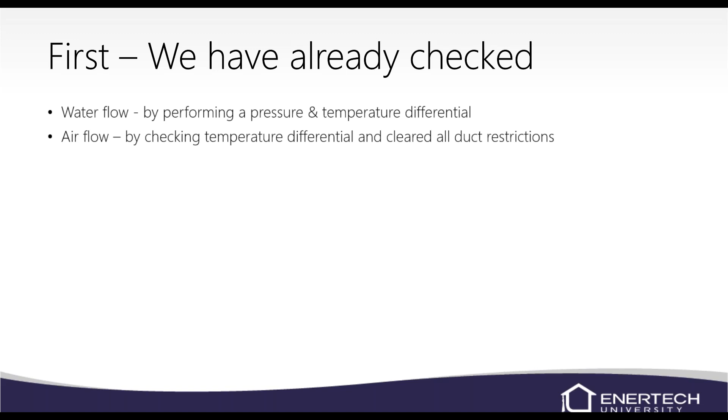We'll go ahead, and obviously we've already checked to make sure we have water flow by performing pressure and temperature differences, to make sure we've got water flow to the unit. Without water flow, we can't diagnose a TXV or a reversing valve. Airflow, if it's a packaged unit, you can usually hear the blower running, make sure your filter's clean, that kind of thing. On a water-to-water unit, make sure you have load water flow too. Make sure when we're installing water-to-water units that we always put pressure temperature ports on the source and on the load. It makes it a lot easier to diagnose when we have those in the system.

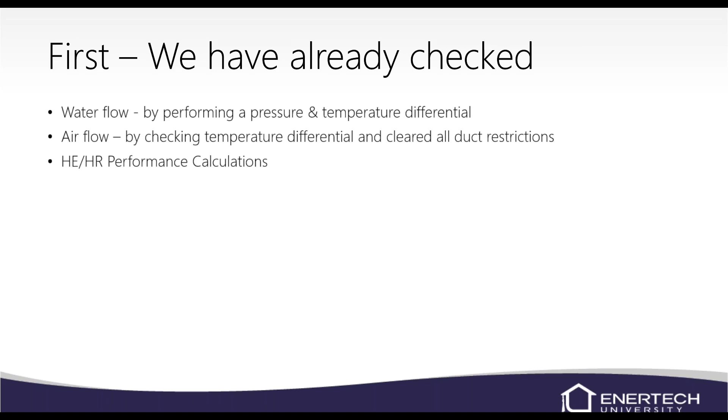We've already checked out the heat of extraction, heat of rejection, obviously it's not working out properly. And don't use your refrigerant gauges until you're sure it's a refrigerant issue. Again, water flow, airflow, and heat of extraction, heat of rejection will tell you if you've got an issue on the refrigerant side, the water side, or the air side. It's a sealed system, so we don't want to put our refrigerant gauges on there too much or start pulling refrigerant out every time we put them on there. Sooner or later, it'll get low on refrigerant.

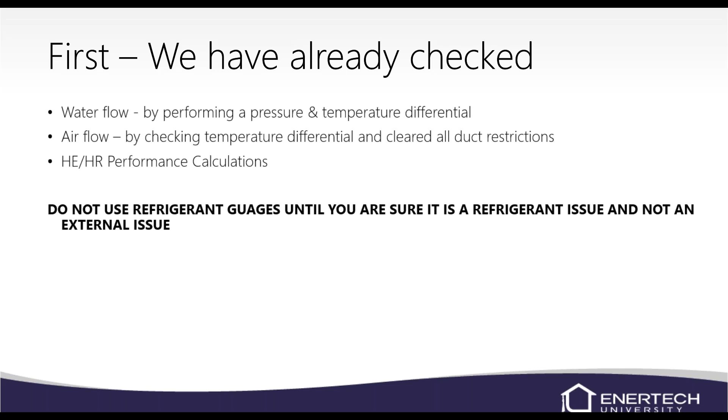So we're going to cover how a TXV works, the causes of a TXV failure, flooding symptoms and diagnosing, starving symptoms, hunting, and restricted.

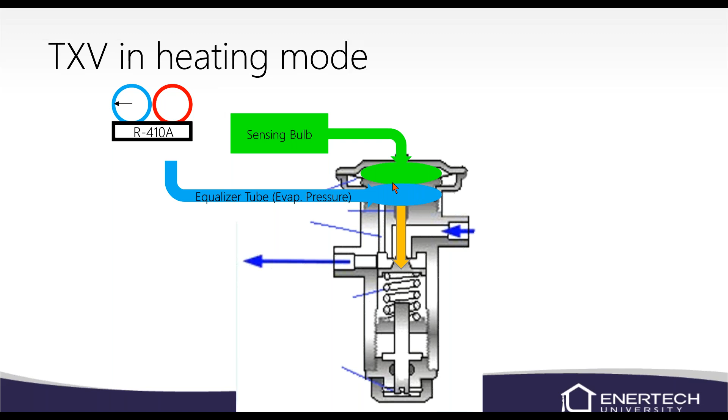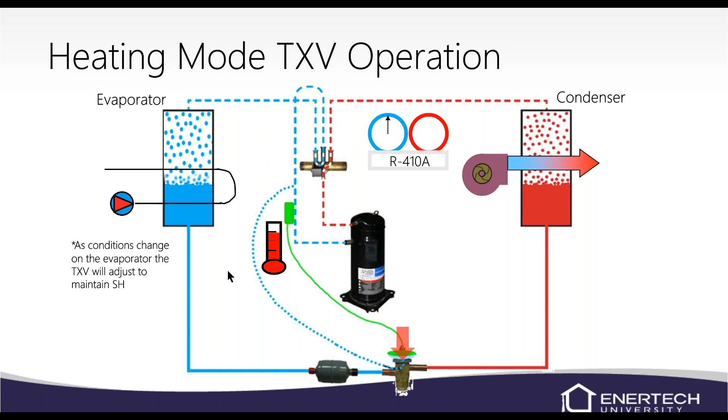So again, heating mode in operation. As conditions change on the evaporator, the TXV will adjust to try to maintain your superheat. An increase in suction line temperature increases the bulb pressure, thus opening the valve and allowing more refrigerant to flow. As the evaporator pressure increases, the temperature gets colder, and it will release some of that bulb pressure and close the valve off.

Obviously we have to have a higher accuracy refrigerant charge when we have a fixed orifice or cap tube system. So in a geothermal heat pump, we need to use an expansion valve because we need to adjust fairly quickly to conditions. The most visible indication of proper expansion valve action is suction pressure variation.

So if you take the bulb off the suction line and put it in your hand and warm it up, you should open up the valve more and allow more refrigerant to flow. So you'll see your suction pressures move by about 5 to 10 psi.

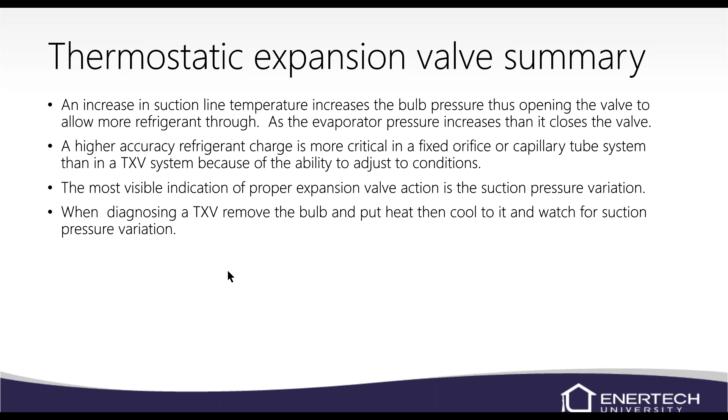Four causes of TXV failures. Flooding, so you're feeding too much refrigerant - it's stuck open, which is very rarely seen. We have starving, so it's not feeding enough - it's stuck closed. That's the most likely failure.

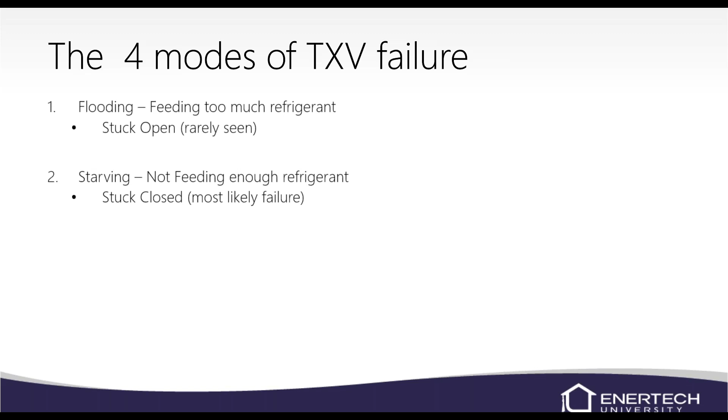A lot of times you'll go out there and it looks like the unit's pumping down, and that would be a stuck closed expansion valve. Hunting - you'll probably see that on your gauges, kind of bouncing around quite a bit. So it's feeding too much, then too little. The reaction is very quick.

It's not working in one mode or the other - more than likely the equalizer tube is plugged. Again, with a bulb loss of charge, we're normally going to send that valve all the way closed because that spring pressure is going to push up. So normally the equalizer tube is plugged up and that piston's not allowed to move up or down, so it's stuck somewhere in between.

Then we have a restricted TXV, so it's plugged up at the inlet. It could be stuck in any position, but again, it's normally going to stick closed.

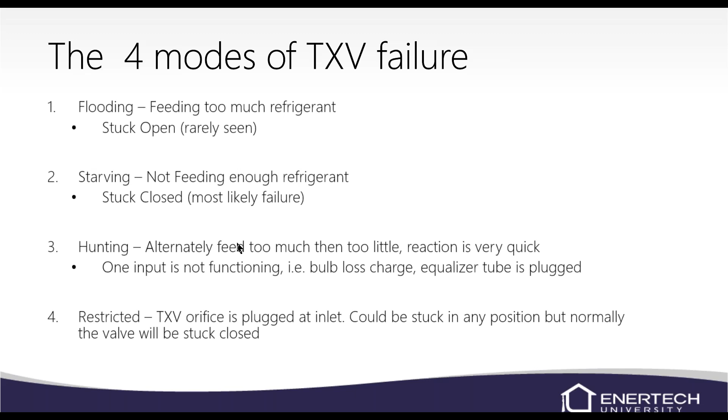This is a TXV that's stuck open. So you're going to have lower superheat and lower subcooling on that.

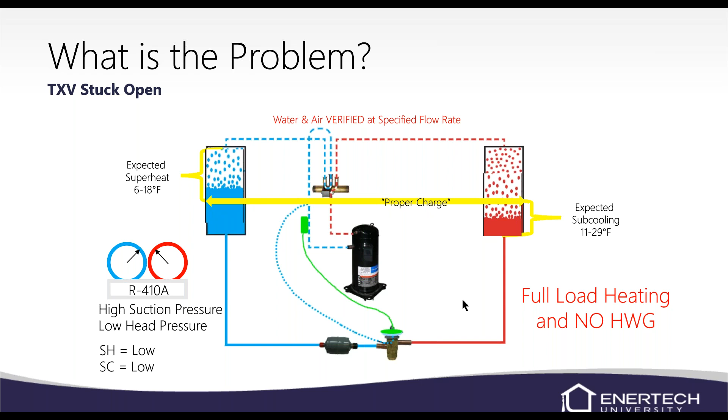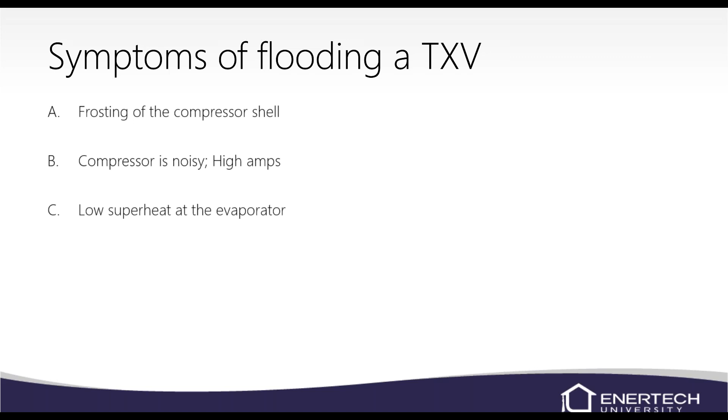Symptoms of flooding: you could have frosting on the compressor shell, the compressor is noisy, it's got high amp draws, it's running hot. You have low superheat and higher than normal suction pressures.

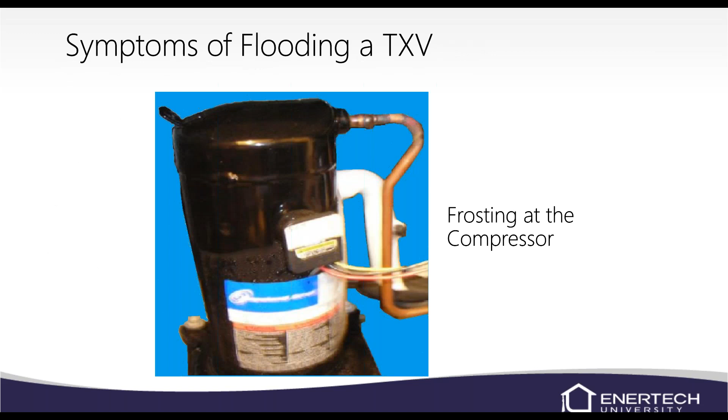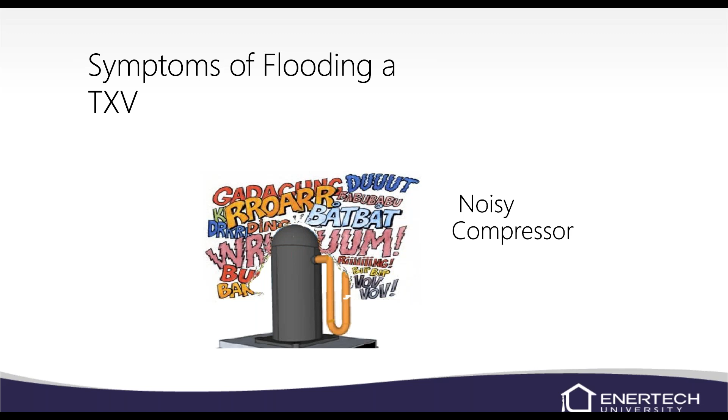There's some frosting on the compressor, usually on the lower half of it, and then maybe on the suction line as well. Noisy, might be rattling around, doesn't really like it. It may go into internal overload. It's really hard to say, but it will be noisy.

You can adjust some of our TXVs. I wouldn't necessarily recommend it, as they're set at the factory for your proper superheat. If you do have to change it or adjust it, remember how many turns you made so if you need to go back, you certainly can. You can count the number of rotations and go back to the original setting.

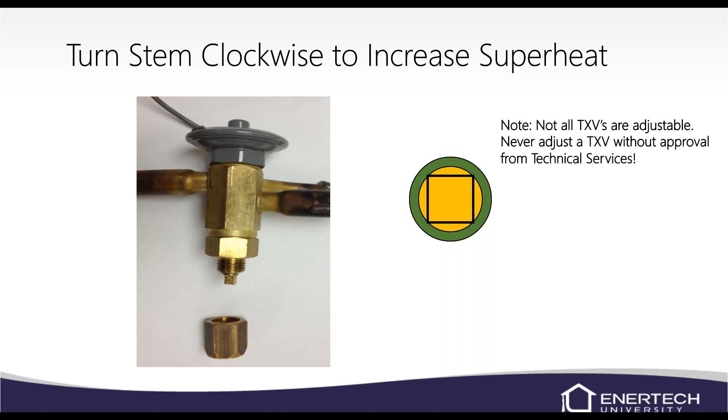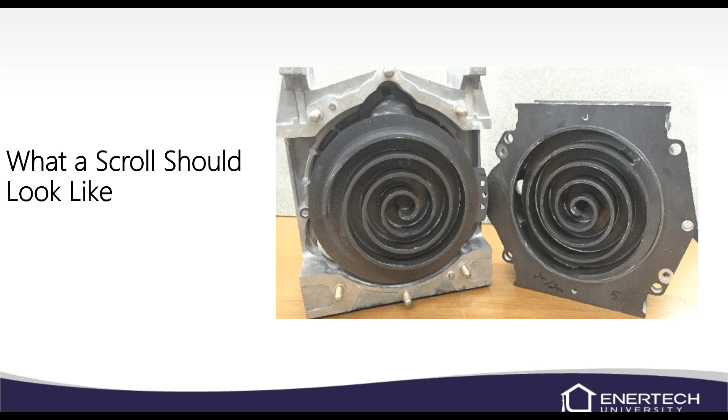This is what a scroll should look like - real smooth, vanes in there, no etching, no pitting, no scarring, anything like that.

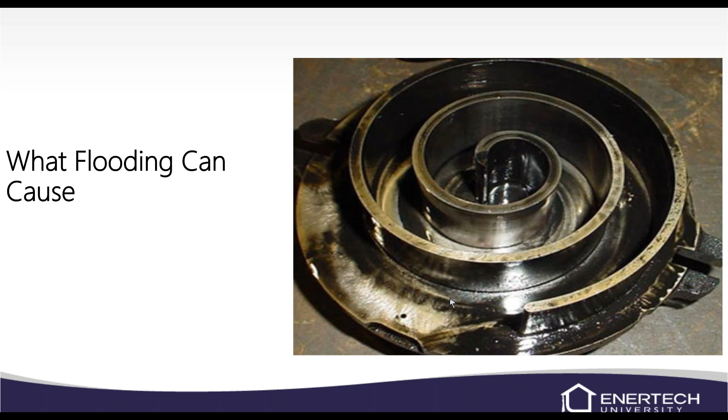Here's one that's flooded. You can see it's worn some of the paint off there on the inlets. It's kind of roughed up here, and you can see some pitting along the walls.

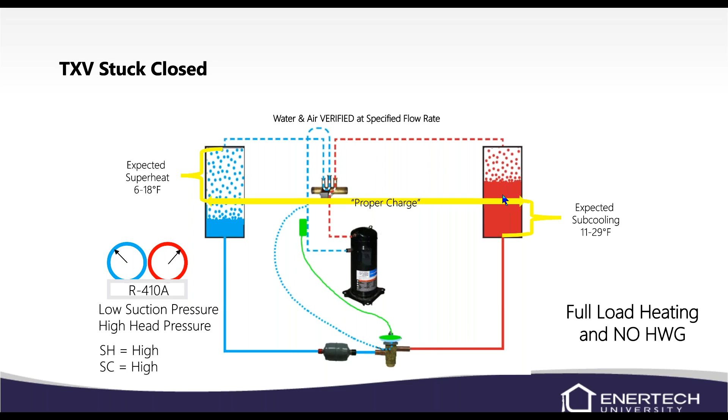Some causes of starving: you could have moisture or debris in the system. If you just made a repair, make sure you always change your filter dryer and that you're brazing with nitrogen, and never torch out a component. Always cut a component out of the system.

Have a restriction on the inlet, clogged strainer. Our TXVs no longer have strainers in them, so we shouldn't really have to worry about that too much. Be low on refrigerant. The pin is stuck in a closed position on the TXV, or the bulb has lost its charge.

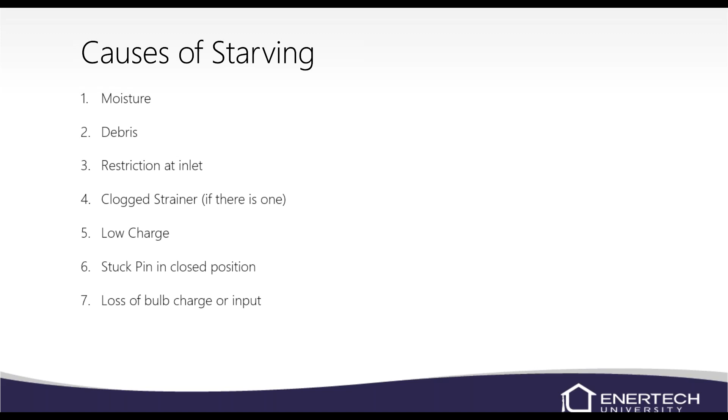If you have moisture or debris, it can actually kind of freeze up inside that TXV, and it won't allow it to open properly. So the fix on that is, again, always replace your biflow filter dryer when replacing components. Install a liquid line moisture indicator/sight glass, and that'll tell you if you're getting moisture in it after you've made your repairs.

And operate in reverse mode to purge some of the debris. Now it's just going to get stuck. It could get stuck somewhere else, but you can try to work it in the opposite direction, try to break it free, and maybe it'll get caught in the filter dryer.

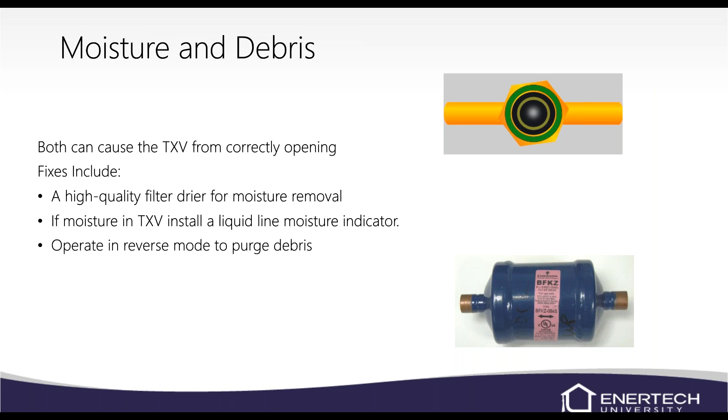So again, loss of bulb pressure. There's nothing to push down on that spring, so therefore that spring pushes up and closes the valve off.

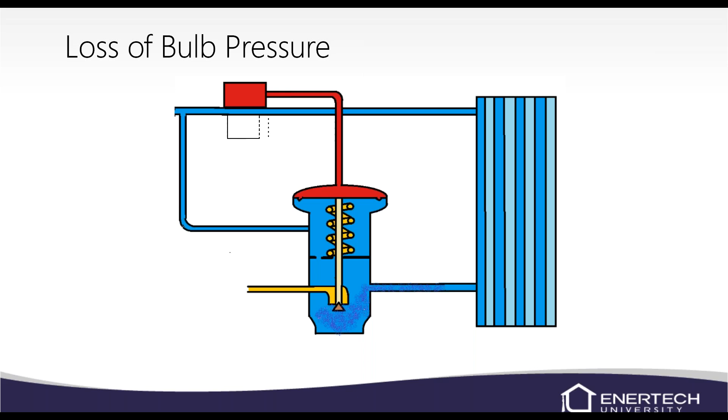We can change just the head and the sensing bulb on the valve. You can normally take that, you have to back up the body of the valve, and you can use a wrench and take off the head, and you can just replace the bulb head.

You can actually take, if you don't know if the bulb is good or not, take the head off the valve, there's a little disc underneath there, and if you tap on that and it's loose, that means the bulb has lost pressure. Normally the pressure will seat that disc, so you can't push it. So if it loses bulb pressure, then it's real loose. You can hear it clicking around in there, and then you know that the head is bad.

If you do replace a head under warranty, please let us know that you're just going to change the head. Just to be fair to everyone, it takes about 10 minutes to change the head on the valve, but it takes a couple hours to change the whole valve. So we pay different amounts on labor on that.

And so we would prefer that you be honest with us. We're honest with you guys. So we would prefer you be honest with us and just let us know that you're just going to change the head.

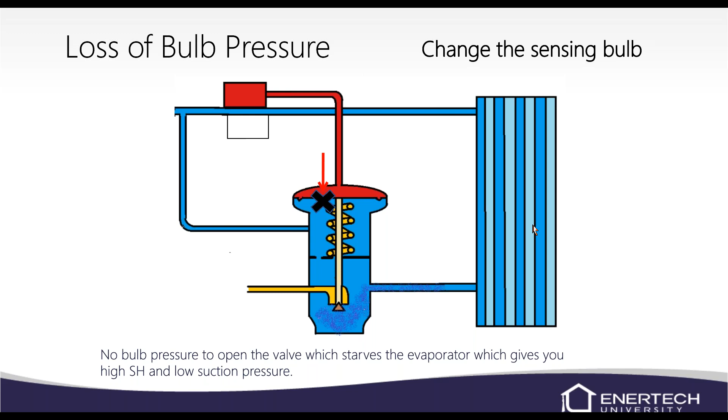Hunting symptoms could actually be caused by an oversized valve. So maybe you got the wrong expansion valve in the system, or maybe it's for a different refrigerant. Bulb location and contact with pipe, make sure it's insulated as well, so it's reading properly.

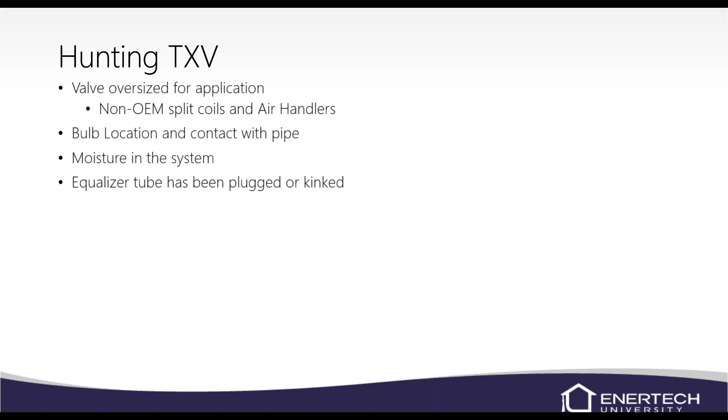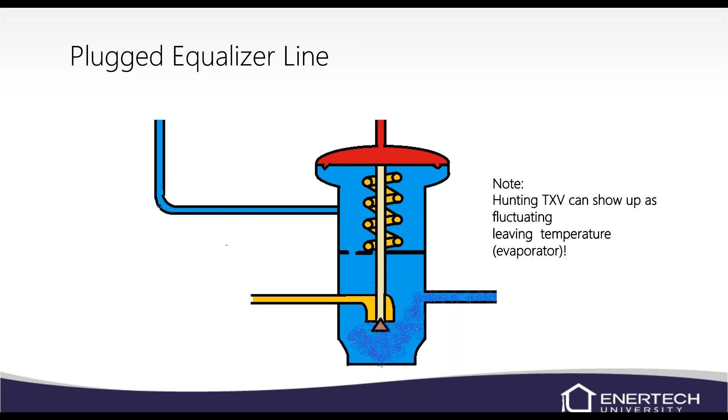There could be moisture in the system. Again, if you suspect that, there are ways to try to remedy that. Equalizer tube is plugged or kinked. You're normally going to see fluctuating suction temperatures, so it's going to be kind of bouncing around there, and that's a sign of hunting.

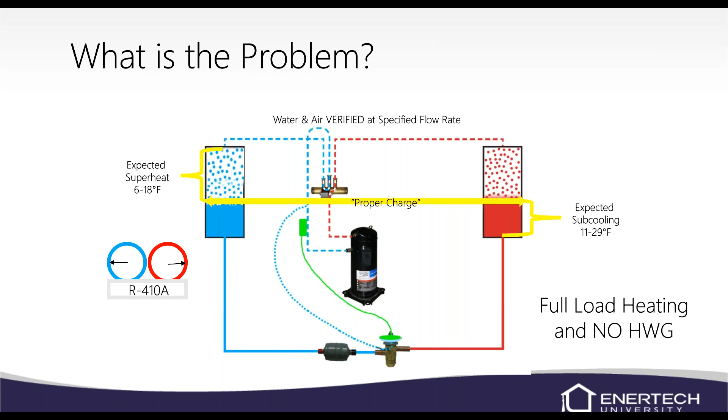Restricted - it depends where the valve is stuck at, but normally you're going to have high superheat and high subcooling. Basically, flash gas is created at the inlet of the TXV, so you can look for either frost or moisture on the liquid line at the TXV. It's basically flashing, and it causes a refrigeration effect right where it's flashing off.

If the refrigerant is normally warmed and such, it's a sure sign of a restriction if it's colder or there's moisture on that line. I don't see the expansion valves frosting a whole lot, but occasionally we will.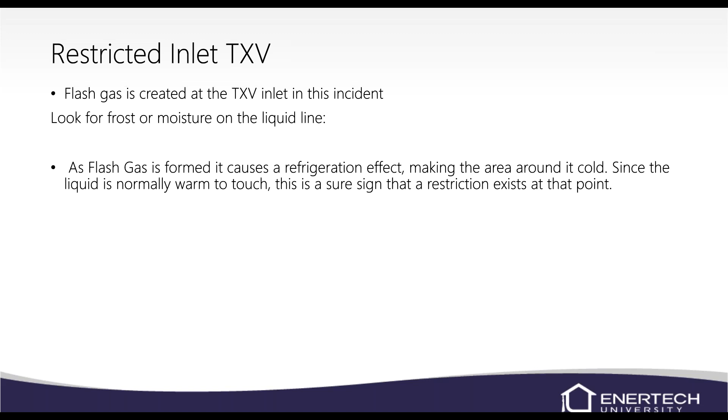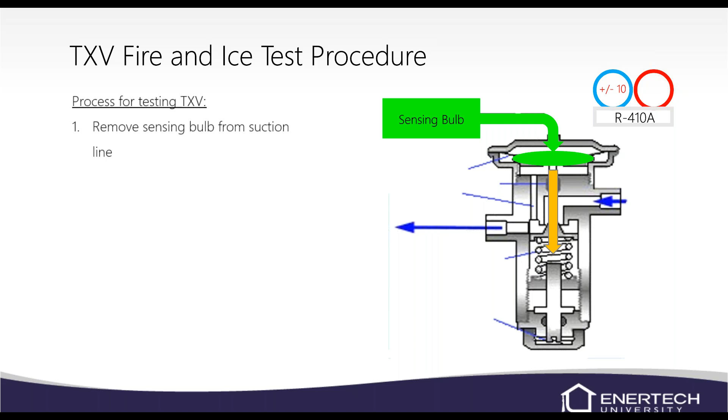Fire and ice test procedure for testing an expansion valve. Run the unit, I don't care if you're running it heating or cooling. We're going to remove the sensing bulb from the suction line. Have to remove the insulation and loosen up those copper straps. Pull that off and put it in your hand and warm it up and watch your refrigerant, your suction pressure.

If you don't have any change on your suction pressure, the TXV is not responding and it will need to be replaced. Again, check the bulb first, or check the head of the expansion valve and see if the bulb has lost its pressure.

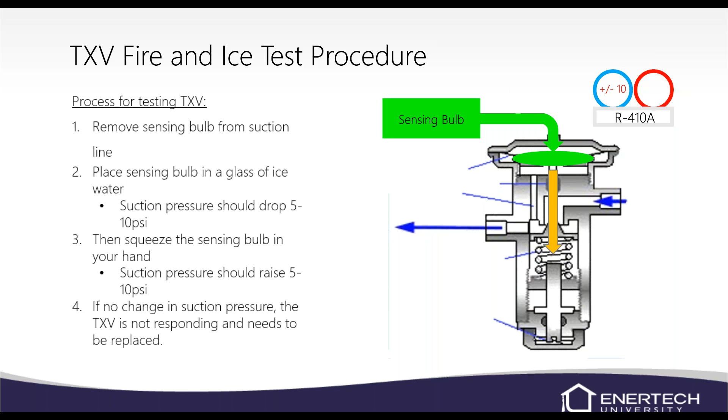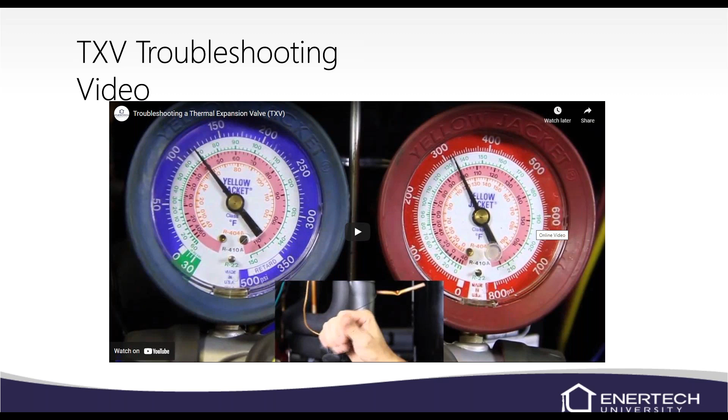We do have a TXV troubleshooting video on YouTube as well. You can see that's actually my hand there holding a bulb, warming it up, and looking at our suction pressure, which is on the left side there. We do have it on YouTube as well.

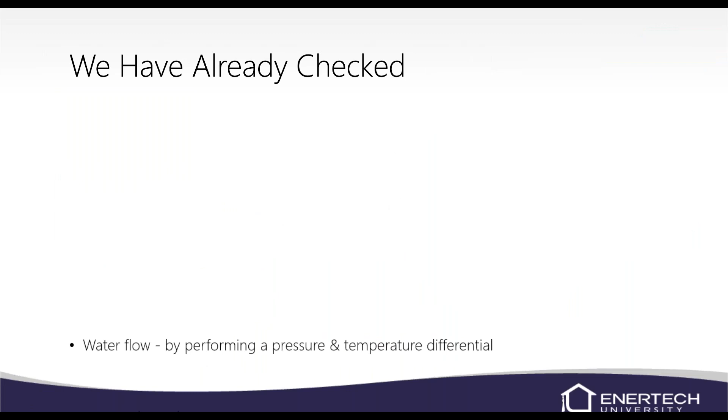Reversing valve. So you've already checked, again, water flow, airflow, and your heat extraction, heat rejection.

We all probably know what a reversing valve does. It switches it from heating to cooling mode. We power our valve, so when it's powered, the unit is in cooling mode. If the valve gets powered but doesn't shift, we're going to be stuck in heating mode.

So our discharge in heating mode goes through the air coil, back through expansion valve, through the coax, through the suction line on the back from the coax to the suction line on the compressor. In cooling mode, we're discharging to the coax, and then we're going through the coax, through our expansion valve, through the air coil, and back on our suction.

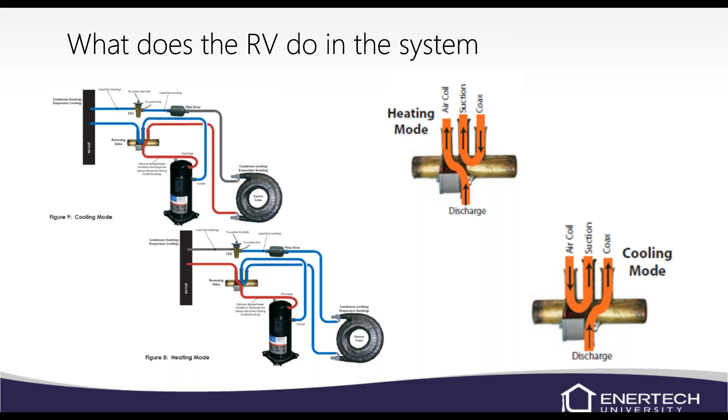It does have a three-way pilot valve on the top of the body of the valve, and that's what actually gets energized, and then it allows discharge pressure to bleed or be pushed on one end of the bell of the slide on the reversing valve, and then the discharge pressure actually pushes the valve over.

The temperature of each line is the way to tell if any refrigerant is bleeding by. So, in this example, our suction and our loop field coil should be the same temperature, and then the discharge in the tube on the left should be the same temperature. If you get about 4 or 5 degree temperature difference in between these, then we know we're probably bleeding through. So these are your pilot tubes.

If you ever really closely looked at a valve, you'll see some really small tubes on the ends and then one on the discharge line. Basically, it bleeds out of the discharge, comes into the solenoid.

Depending on where this black slide is, if it's over to the left here, like in this diagram, it's going to push over on this side. Because this pressure here is your discharge pressure, and this pressure here is your suction pressure. So we got more pressure on the left than we do on the right, so it's going to slide that valve over to the right.

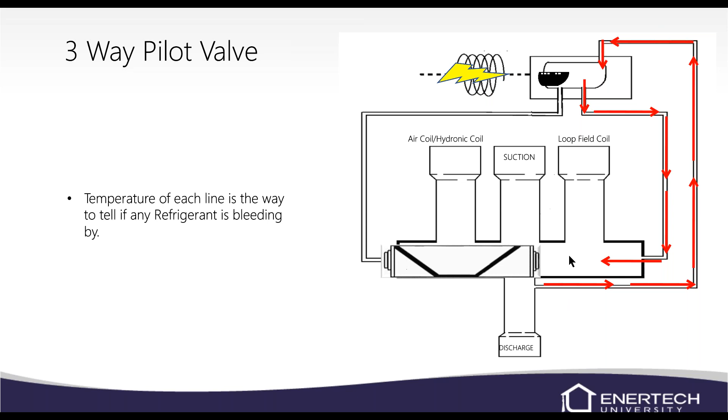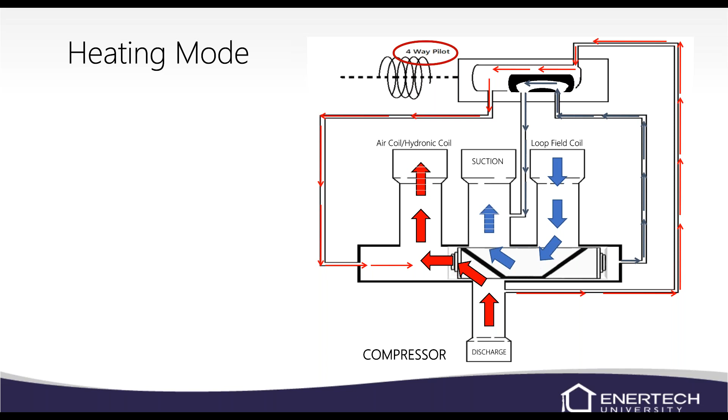The reversing valve won't shift because your pressures won't change. In heating mode, again, the valve is not energized, so that's going to be the path of the refrigerant. In cooling mode, now it's energized, slides over, bleeds off that higher pressure on the discharge. Now your discharge is coming through on the right side, and it's going to slide that valve over.

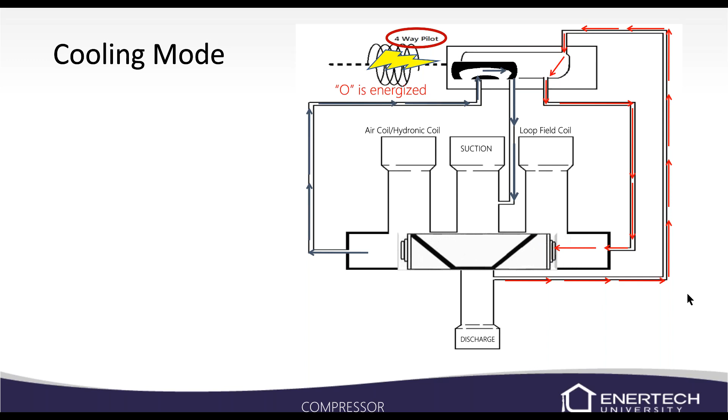Failed solenoid coil. If you have an O call, which is for the reversing valve, or our cooling call, if it doesn't respond, it will fail safe to heating mode.

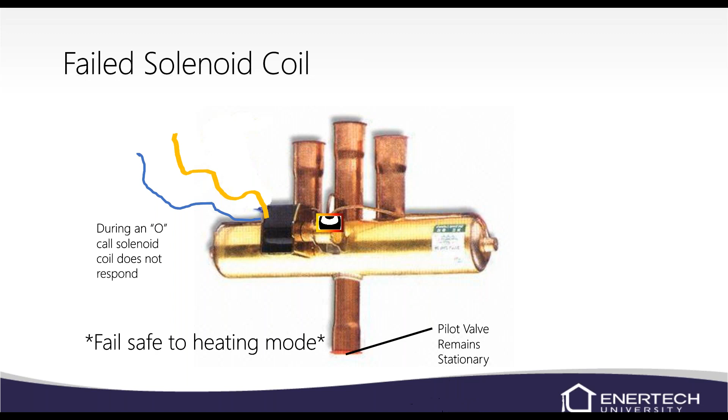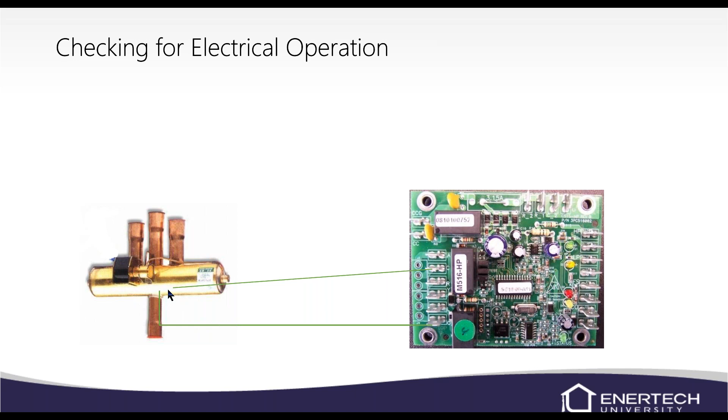Obviously, check the electrical operation, go to the lockout board and check between common and O, and make sure you have 24 volts going to the valve itself. You can also ohm out the coil on the valve. If it says OL, then it's open and it'll need to be replaced.

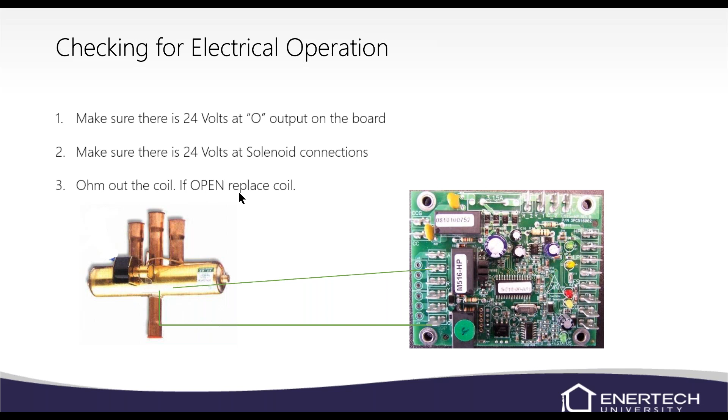Refrigerant leaks. Normally, if we see refrigerant leaks, we see them more on a water-to-water unit. A lot of times it's because they're running the unit too hard, with too high an aquastat temperature, and it starts to rattle the unit with a real fine harmonic vibration. These little pilot tubes will leak, break, or snap off. It's kind of hard to see, and it won't really leak a whole lot of refrigerant at one time. It really depends on what mode it's in as to what type of refrigerant it's going to leak.

So check those. I have seen on these ends, those are pressed in and then soldered shut. I have seen these little end bells leak as well. The body of the valve, I doubt that it's going to leak, but where these pipes come in, they could leak there, the end bells, or the pilot tubes.

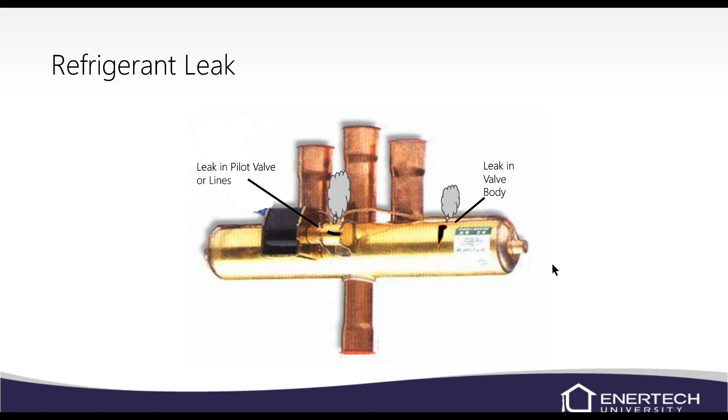If it's sticking while heating or cooling, that could be caused by debris. If you have an acid burnout on a compressor, when you file the warranty on that, you can most certainly ask for a reversing valve. If you think there's going to be a lot of debris in there that could get stuck in that reversing valve, I don't have a problem with it. I'd rather have you change the reversing valve when you change the compressor than install the compressor, run the unit, and realize that you're going to have to change the reversing valve. Now you've just doubled your work.

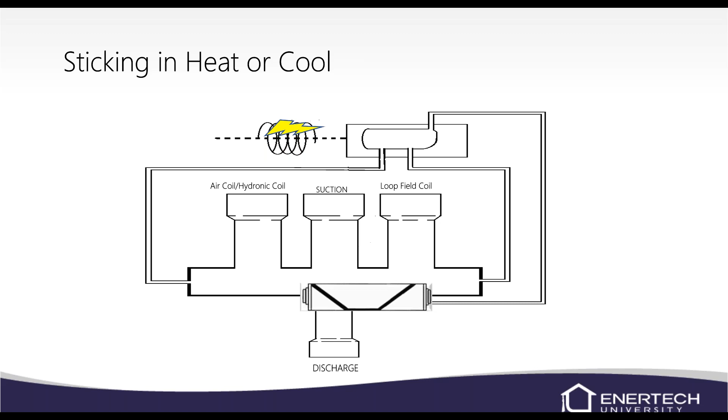Now, if you have to change the reversing valve, it's going to add 4 more braze connections and about half an hour of time. So it's not as big of a deal. It's a lot cheaper on everybody there.

If the valve sticks in mid position, usually the refrigerant pressures will not be equal, but they're going to be close. When they're equalized, that's usually the compressor not pumping. When you're bleeding through, unless you're bleeding 50-50 on all 4 lines, you're not going to get equalized pressure. Normally it's going to be maybe 150, 175, 130, 175. They're going to look weird to you, and you'll have low discharge pressure and a little bit higher suction pressure.

Again, that could be caused by debris. Maybe the valve's got a defect in it, a big dent or something, I don't know why. But again, they're a little bit off, not quite equal, but look somewhat similar, and you've probably got a problem with your valve.

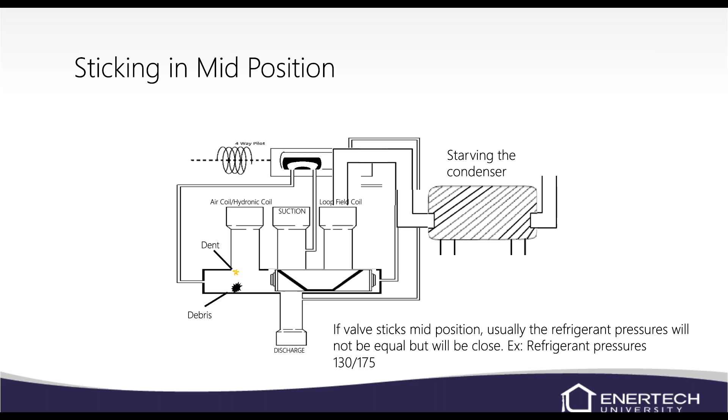This would be sticking in mid position. When it's sticking mid position, it could sound like a scroll compressor running in the wrong direction, and the unit may go out on internal overload. You will be starving the condenser.

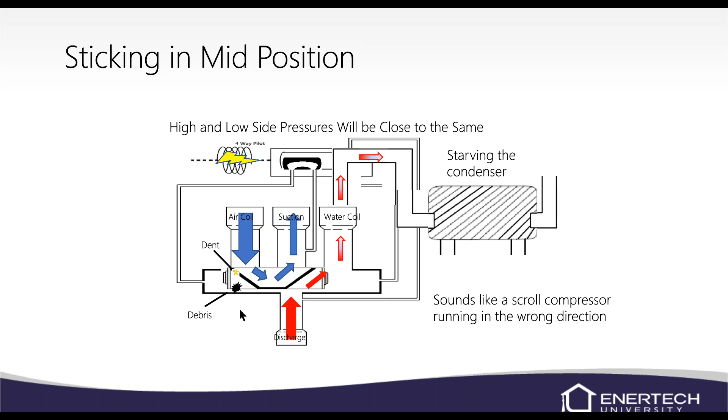You can get these little earth magnets from Michael's or Hobby Lobby or something like that, little bitty round magnets. You can put those on the valve body, and they won't stick to the valve body, but they'll stick to the slide that's underneath that valve body. The valve body's brass, so it's not magnetized. So you can put the little magnets on the ends of that slide internally. This is metal here, this is metal here, so those earth magnets will sense that. You can put 2 earth magnets on it, power that valve up, and see if it slides, and kind of watch those magnets to see what kind of travel they have.

The inside seals leaking, again, that's going to be bleeding through. Then measure your temperatures. Obviously, your suction and your water coil in this picture should be the same temperature, plus or minus about 3 degrees. And your discharge and your air coil should be about 3 degrees, no more than 3 degrees difference as well.

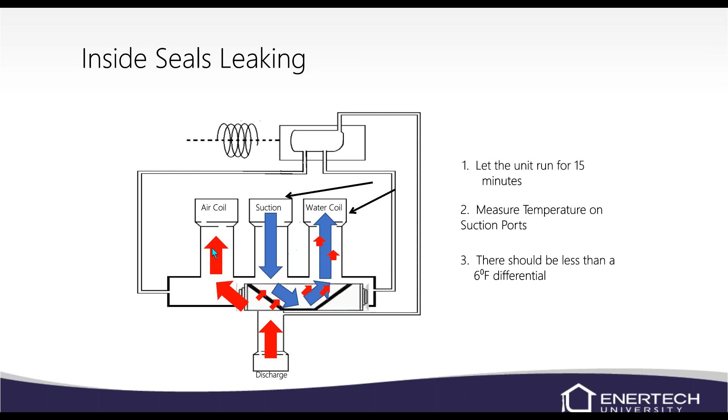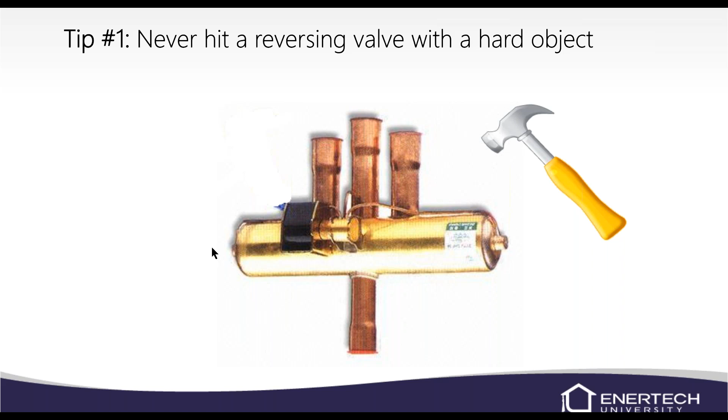You can tap it, or if it won't shift, you can try to tap it. I wouldn't hit it real hard because you can dent the body of the valve, but at the same time, the valve's not working anyway, so what's it matter? You can try to tap it and see if it'll work and get it to slide. If it does, more than likely it's going to get stuck again, so just replace the valve.

If you're in a pinch, sometimes you can get a great big magnet and put it on there and energize the valve, and when you energize it, slide that valve over by hand, and it may slide over. It'll have to be a pretty big magnet, though. Never cut copper pipe with a hacksaw of any sort. I always use tubing cutters. We lose a lot of copper shavings in the pipe when we cut it with a hacksaw.

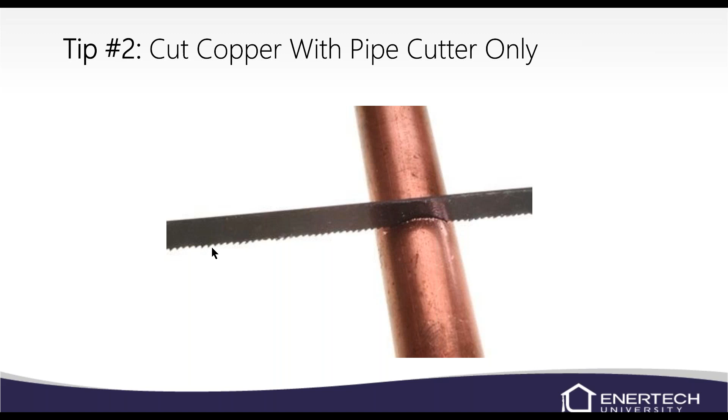We recommend, if you're going to replace the valve, that you cut it away from the valve. We're not too worried about overheating the old valve getting it out, but it's a lot easier to braze the new valve in if you've got some pipe coming out, so you can braze the valve outside of the unit rather than trying to do it all in the unit. It's a lot easier to keep it cool.

We have what's called a spider kit that you can order on some of our units when you're replacing the reversing valve. Check with customer service to see if you've got one, but it comes with stubs brazed on at the factory at the valve itself. Then you can cut anywhere you need to in the field and use some slip couplings, and braze way out here rather than at the body of the valve.

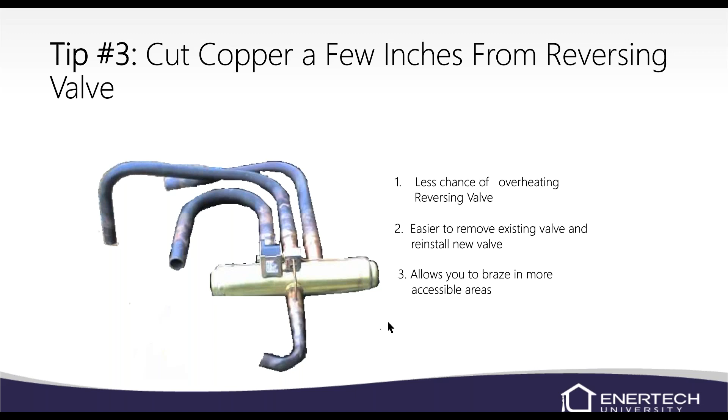That's a nice little feature we've added since I've come to Enertech. It was one of my recommendations, so we worked with customer service and the factory and got that available.

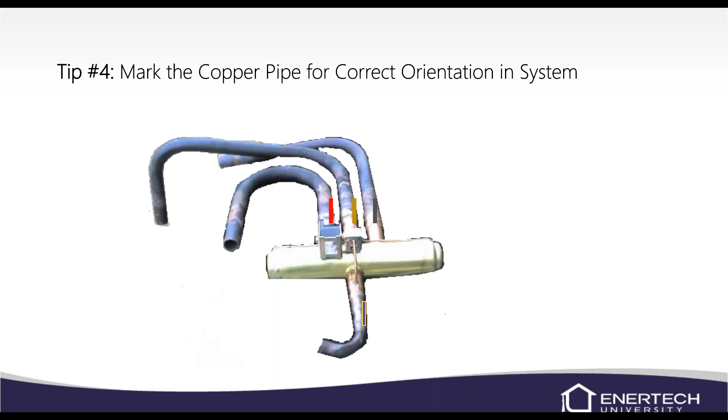If you don't have a spider kit, I would recommend marking the lines so that you can line it back up once you get them out. Then you can reinstall those markings and braze it at your truck, and go inside and braze farther away.

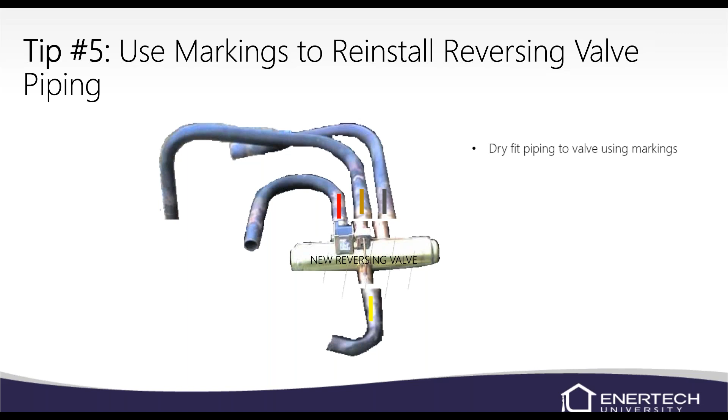Make sure you're using a wet rag or some thermal paste of some sort. They've got some spray gel as well, whatever you feel most comfortable with. But there's some Teflon seals in those reversing valves, and you can overheat them pretty quickly.

If you're brazing on it and all of a sudden you see a black puff of smoke come out of one of your tubes, then you've just overheated your seals, and you don't need to go any further. You need to replace that valve. It's really easy to overheat one of them, especially if you don't have a lot of brazing experience.

It just takes time to get comfortable doing it. I'm sure most of us have overheated a valve of some sort when we were younger. I know I have, and I'm not afraid to admit it. Sometimes the best way to learn is by doing something wrong.

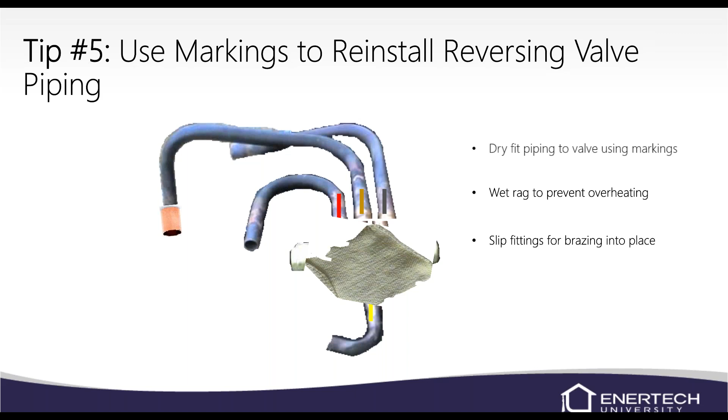It just takes practice. Time will get you there, but make sure you always wrap it. I don't care how much time you've been brazing, it always needs to be kept cool.

Again, on a compressor burnout, I am perfectly fine with replacing the reversing valve. On a burnout, we need to do an acid cleanup as well. So if you're not sure how to do that, we have some documents here at Enertech that will assist you.

We would recommend a suction line filter dryer, obviously a liquid line filter dryer. You can replace the reversing valve. If you want to replace the expansion valve, that's fine too. I doubt that's probably going to be the problem, but make sure we're always doing an acid check when you suspect a compressor burnout.